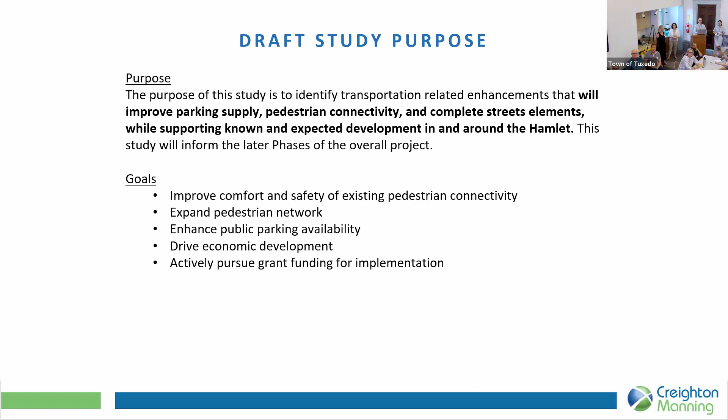You can see our study area here on the next slide. It goes from Southside Place at the south side all the way to East Village Road in the north. You can also see a number of pictures we took during our field walk, where we looked at the existing conditions.

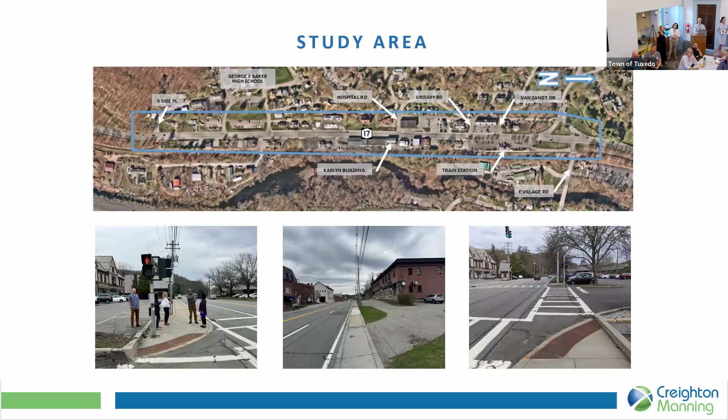So why are we looking at this study now? It builds on a lot of the previous studies done for the corridor, most notably the 2022 streetscape improvement study. This study will build off of many of the recommendations from that plan, identify obstacles to improvements, and really get your input so there's a lot of support for the plan moving forward.

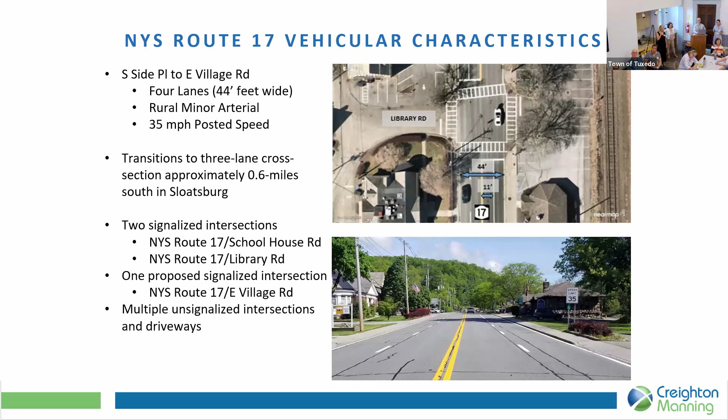Looking at existing conditions, you can see a number of the roadway characteristics here on the screen. Notably, right now the Route 17 corridor is a four-lane roadway. When we look at traffic volumes, we see the road carries about 15,000 vehicles per day, which is below the capacity of the road—indicating there might be an opportunity to repurpose lanes to free up space to make it more inviting and friendly for pedestrians to come, stay, visit businesses, and spend their money.

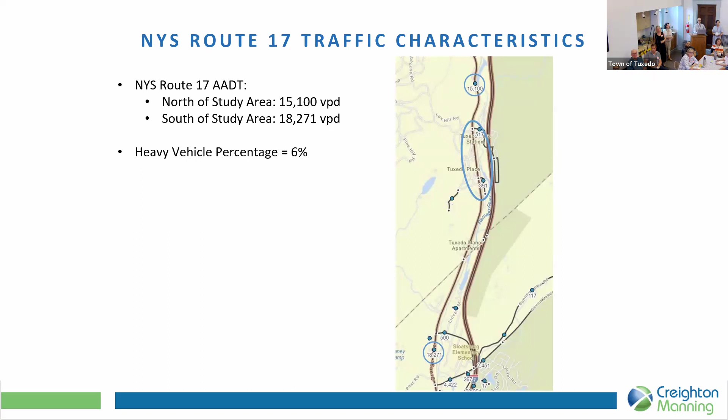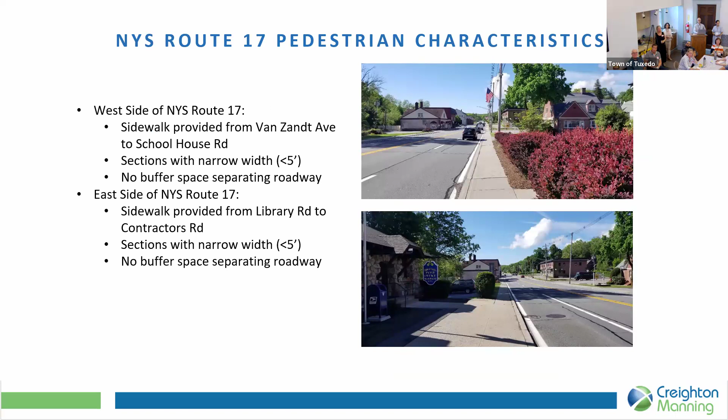Looking at pedestrian characteristics now, it's important to note that the sidewalks are narrow. They're not up to DOT standards, very close to the roadway, and there are gaps in the network, which make it hard for people to get where they need to go. Again, this makes it less inviting and less likely that people will stay and enjoy the corridor.

We also took a look at the transit services in the corridor. It's one of the unique things in Orange County that the Route 17 corridor has both bus and train transit service. So all the concepts we're going to show you really do consider connectivity so that people can access those services. With that, I'll turn it over to Dave.

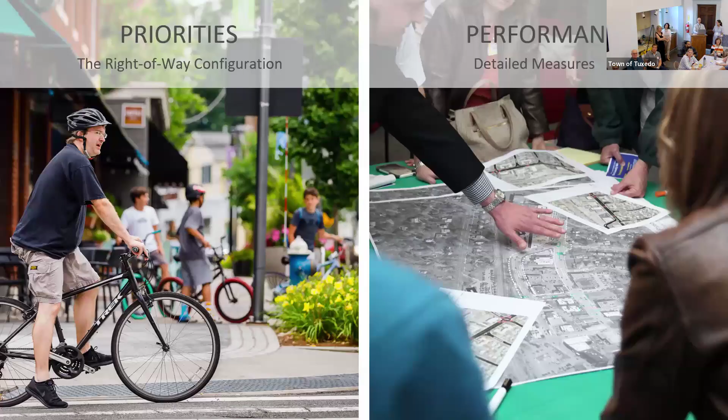Alright, well thank you. My name is Dave Lustberg. I'm an urban designer and landscape architect with a company called Arterial, and we're a subconsultant to Creighton Manning Engineering. Our real job is we focus on street design of streets and public spaces, so that's what I'm going to speak to a little bit here.

So when we look at the streets in Tuxedo—just by a show of hands, how many people here are store owners? And how many are residents? All right, all residents, great.

Perfect. So when we think about the streets in Tuxedo, we want to think about all the purposes those streets can serve. Like Deidre mentioned, the importance of infrastructure—we spend a lot of money on these things, and we want them to do the best that they can for us.

So the first thing we look at when thinking about streets is priorities. We look at the street and decide how we want that street to function—do we want it to be more for cars, more for people, more for bikes? What purpose do we want it to serve?

The next thing we look at is performance, which is the design of that street—the materials, the actual nuts and bolts of the street, the lighting, etc. So today, for this first session, we're going to focus a lot on the priorities. We want to make decisions about how our streets and public spaces are used, and a little bit about performance. So go ahead, Lexi—this is a scale we use when we think about priorities.

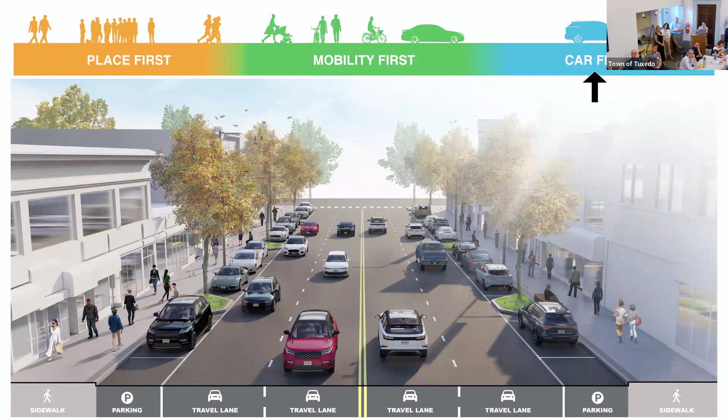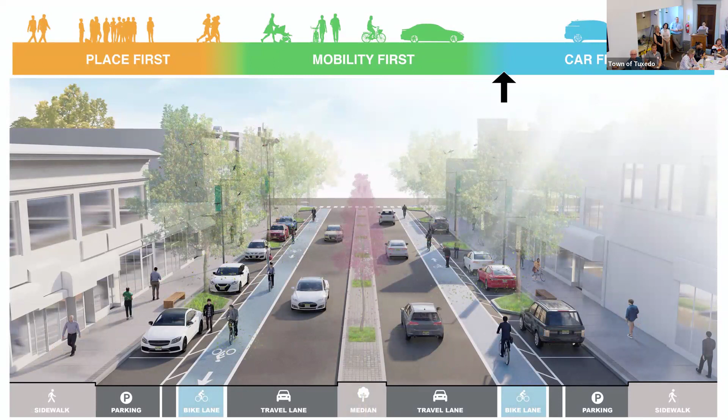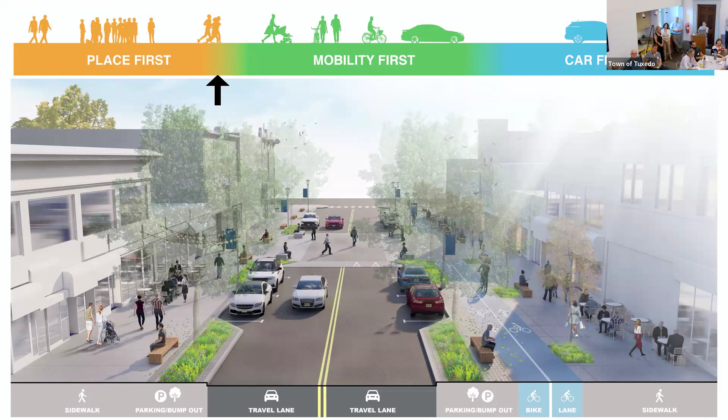So then we can also take that arrow and push it further to the left. Now we've widened the sidewalks even further, we have protected bicycle lanes, and nice spaces for pedestrians. We could even push it further to the left, and this is like a typical cross section for a main street—nice wide sidewalks, a mid-block crossing, bump outs with landscaping, some nice seating pockets, lighting, and so on.

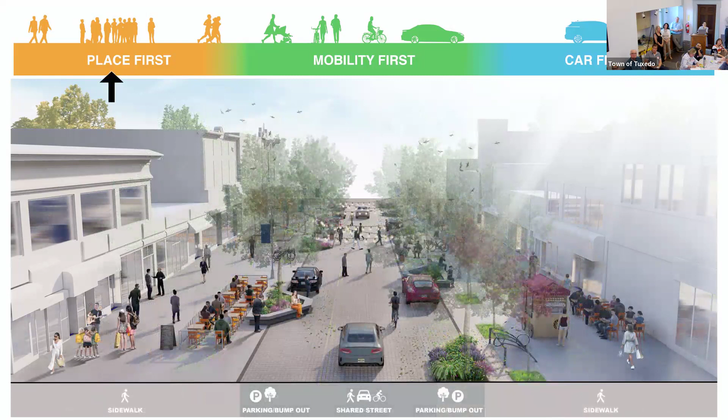And then we can take that arrow and push it all the way to the left, and this is what we call a shared street—a street that really prioritizes pedestrians, and cars become secondary on that street.

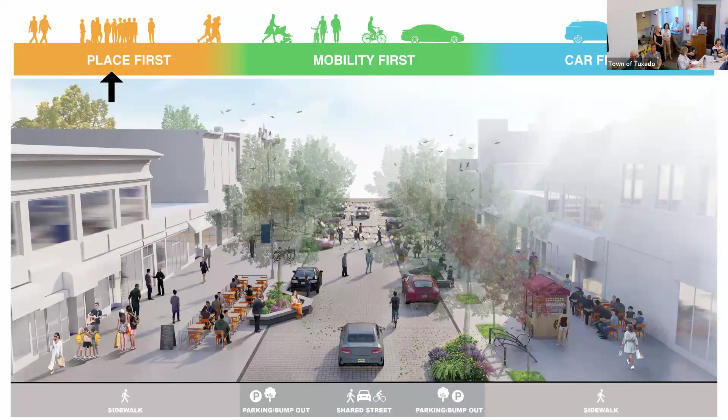Again, I want to reiterate that we're not suggesting that far to the left on this scale is the better thing. It's just that we want to decide as a community how we want our streets to be used. So if the car is far right on this scale and we feel it needs to be a main street, then we know we have to take steps to move that arrow. That's what we want to learn about today. So let's go ahead—we'll show you some examples.

So this is about the performance. We look at street performance across 5 categories, and we're going to touch on this a bit today, but the focus really is on the priorities. The first is functionality—we want the street to operate the way it should.

Arts and culture—does the street represent the place that it's in? Do the streets in Tuxedo and the public spaces represent the culture and history of Tuxedo, the story you want to tell? Health and the environment—are they sustainable? Economic vitality is a very important one that Deidre was touching on—we want to make sure we're designing these streets to really foster economic vitality in our stores and commercial properties, and really have those places thrive.

And then finally is design quality. This isn't subjective, like whether you like the design or not—this is about quality materials and quality detailing, so that once we build this, if we're lucky enough to get this grant, we don't want you saddled with decades of maintenance. We want to build it the right way, with quality materials. So now we'll show a couple of examples.

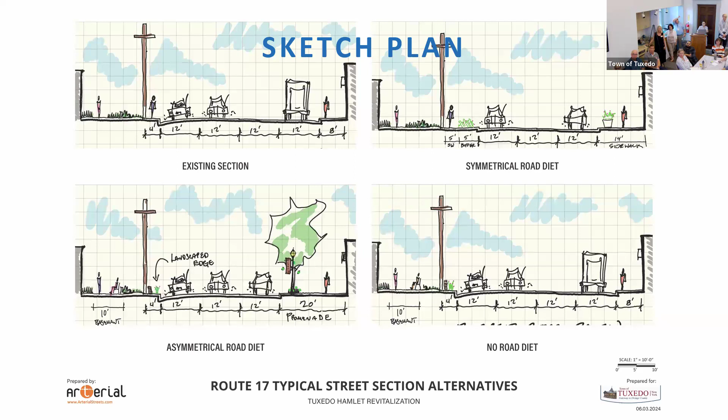This is a state road and we have to deal with New York DOT, so we don't know if we can get a road diet or if we want one. That's what we're going to find out tonight. If we can't do a road diet, then we keep the 4 lanes and we have 8 feet on the one side, which we have today, and we just build on that. The 8 foot we could work with, and then we inboard the sidewalk on the other side, on the library side. So those are some options on how to get the sidewalks in there.

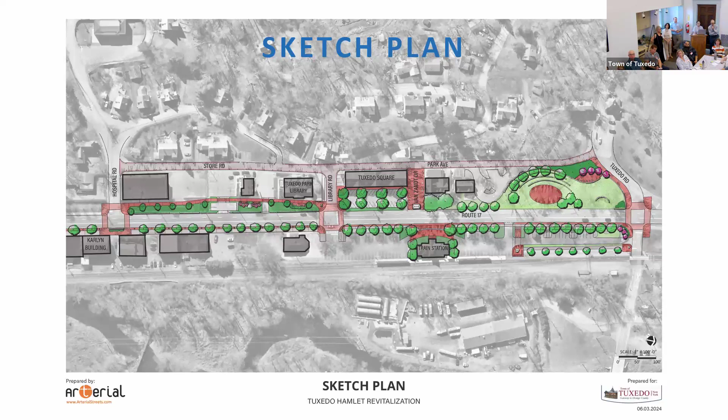So the last thing I'll mention is this presentation is really all about priorities, right? We're discussing a lot of what can we do with this street, how can we use that street. There's a layer on top of this that will be the performance. And that includes things like lighting, right? So we're going to look at lighting throughout the downtown so that we know there's safe, effective lighting as you're crossing into the downtown. It doesn't feel dark. We'll talk about materiality and furniture and all of those fun things.

But that's to come. So with that, do you want, Mark, you want me to break everybody up or? Yeah, I'm happy to do that.